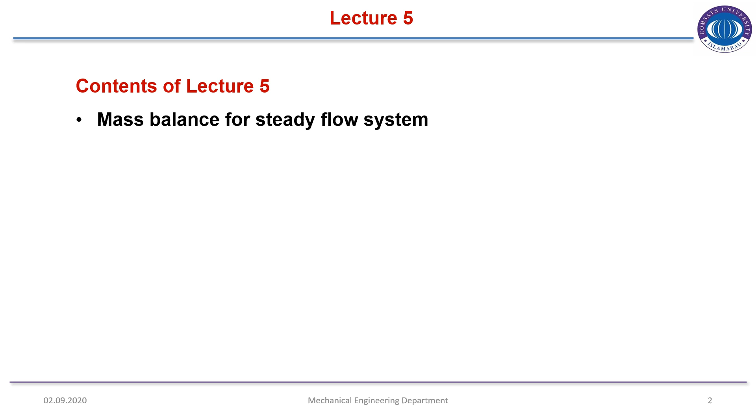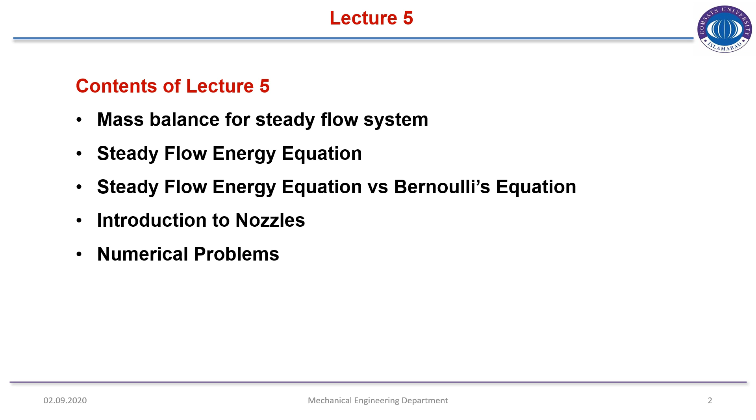Lecture 5. Contents of lecture 5 are mass balance for steady flow system, steady flow energy equation, steady flow energy equation versus Bernoulli's equation, introduction to nozzles, numerical problems, conceptual question and answers.

Mass balance for steady flow systems. First, we will discuss some basic definitions of different types of systems. The first one is non-flow process: a process occurring in a closed system which does not permit mass transfer across its boundary. You can compare non-flow process to closed systems. Mass cannot transfer across their boundary, however during non-flow process, energy and work can cross the boundary.

Flow process occurs in an open system which permits mass transfer across its boundary. So in flow process in an open system, mass is allowed to transfer across the boundary as well as energy and work.

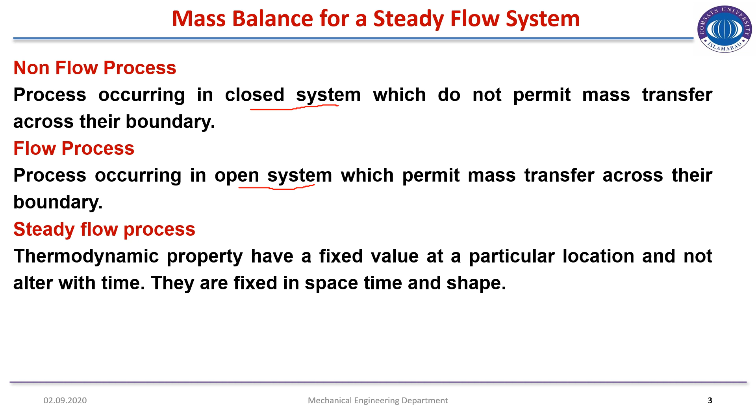Steady flow process: thermodynamic properties have a fixed value at a particular location and do not change with time. They are fixed in space, time and shape. Thermodynamic properties like temperature, pressure, mass flow rate, specific volume, all these are properties of the system. Therefore, in steady flow process, they will not change with time.

Even energy, the rate of energy in is equal to the energy rate at the outlet.

Non-steady flow processes, also known as transient flow processes, are where thermodynamic property varies or changes with time. They are not fixed in space, size and shape. So in transient flow process or non-steady flow process, energy flow in minus energy flow out is not equal to 0, whereas in steady flow, E in minus E out is equal to 0.

Similarly, mass flow in minus mass flow rate out is not equal to 0 in non-steady flow. We will discuss these processes in detail in the upcoming lecture.

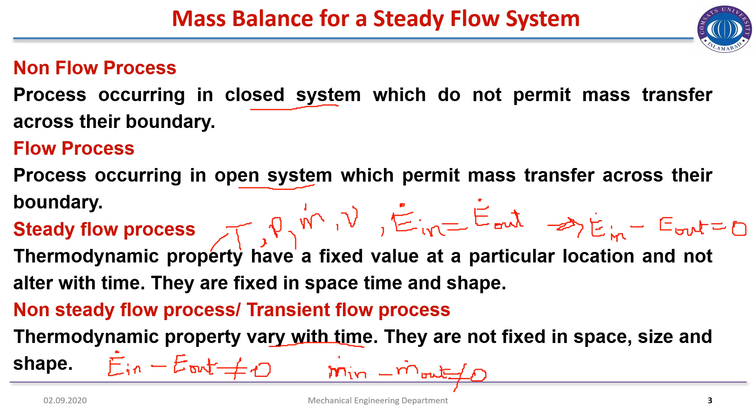Total amount of mass contained within a control volume does not change with time - this is talking about a steady flow system, steady flow process. Total mass entering the control volume is equal to total mass leaving the control volume per unit time. So mass flow rate, this is applicable for steady flow.

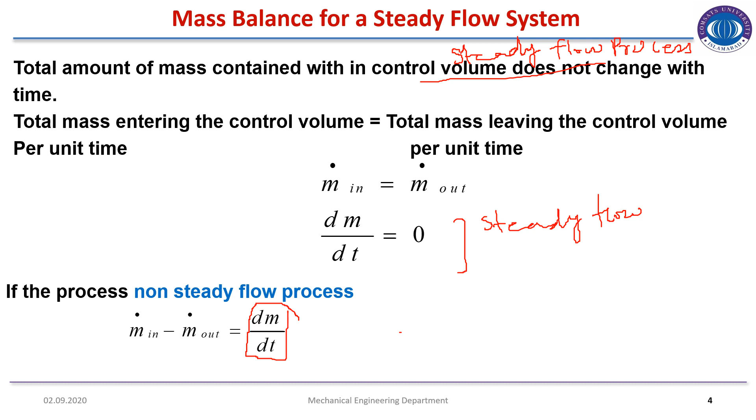In unsteady flow, this will have some value, as there must be an amount of mass transfer in non-steady flow process. You can understand it more easily: if the process is steady, 2 kg of mass per second entering means 2 kg per second mass flow rate will be out at the outlet. However, in non-steady flow process, there might be an instant where 1 kg or 1.5 kg per second mass is getting out.

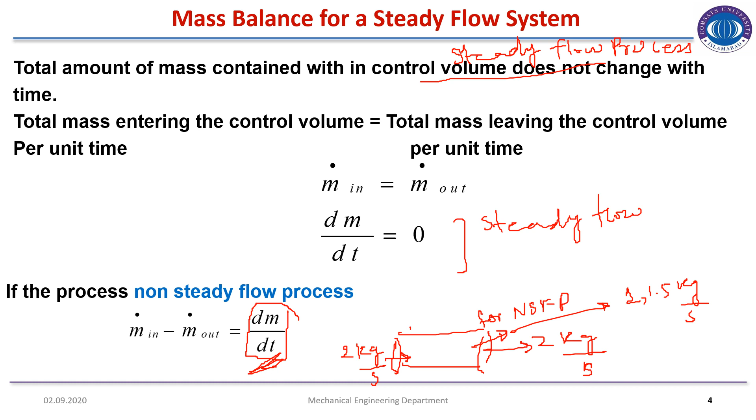That's why the change of mass flow rate is shown here. So this is the continuity equation, or you can say mass flow rate in is equal to mass flow rate out. We will derive a relation here. Density is equal to mass over volume, therefore mass is equal to density into volume.

On both sides we have divided the equation by time, and volume is equal to cross sectional area into length. So mass divided by second on the left, and on the right hand side that is density, cross sectional area, and velocity. Length or distance divided by time is equal to velocity, represented by small c. I have used small c to represent velocity so students should not confuse it with specific volume or volume.

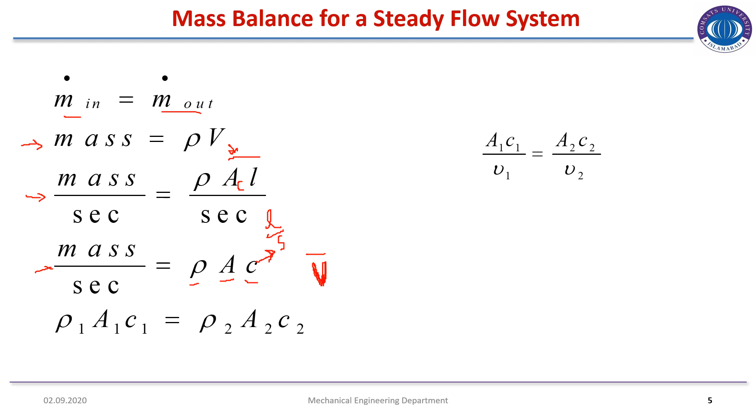In the book you might see the author has represented velocity with bold V. So you should not get confused - I have mentioned here also that C represents velocity.

So mass flow rate is constant. On the left hand side, this mass flow rate value is constant. Therefore we can obtain a relation: rho1 A1 C1 is equal to rho2 A2 C2 at any instant throughout the process, where rho is the density of the substance, A is the cross-sectional area, and C is the velocity.

As you know, density is equal to mass over volume, and density over mass is equal to 1 over volume.

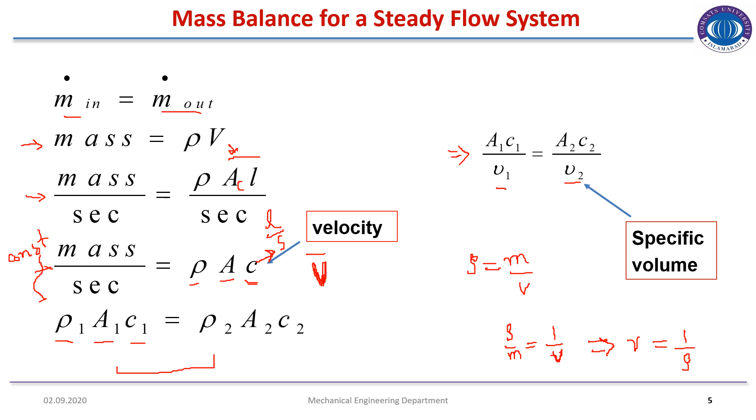Specific volume is equal to 1 over density. So we have replaced the density with the specific volume, which is the volume divided by mass. So the relation we have obtained is A1 C1 over V1 is equal to A2 C2 over V2, where A is the cross-sectional area, C is the velocity, and V is the specific volume.

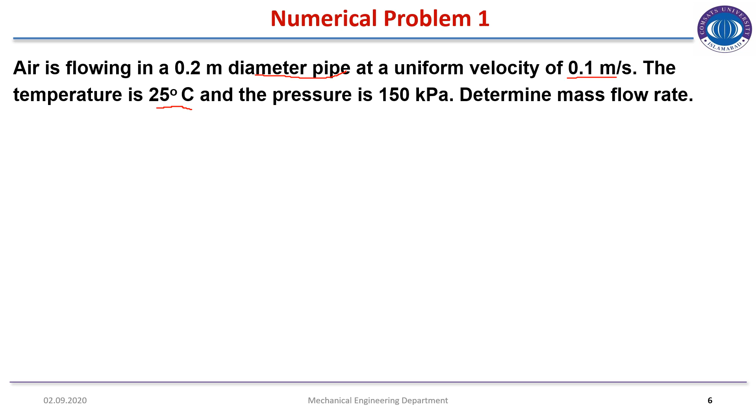Now we will solve a numerical problem. The statement of the problem is: air is flowing in a 0.2 meter diameter pipe at a uniform velocity of 0.1 meter per second. The temperature is 25 degrees centigrade and the pressure is 150 kilopascal. Determine the mass flow rate.

So there is a pipe. The values are, I have underlined the values. Diameter of the pipe is mentioned, velocity, and the temperature. In thermodynamics, you should always remember that wherever the word temperature is mentioned, all the formulae are used for the absolute temperature scale. Therefore, if a temperature is given to you in Celsius scale or Fahrenheit scale, you should convert it to Kelvin scale.

Now, this is the relation we have derived in the previous slide: M dot is equal to AC over V, where A is the cross-sectional area, C is the velocity, and V is the specific volume. We also know that this is the equation of state: PV is equal to mRT. We have divided this with M on the left hand side, so pressure into specific volume is equal to RT, and specific volume is RT over P.

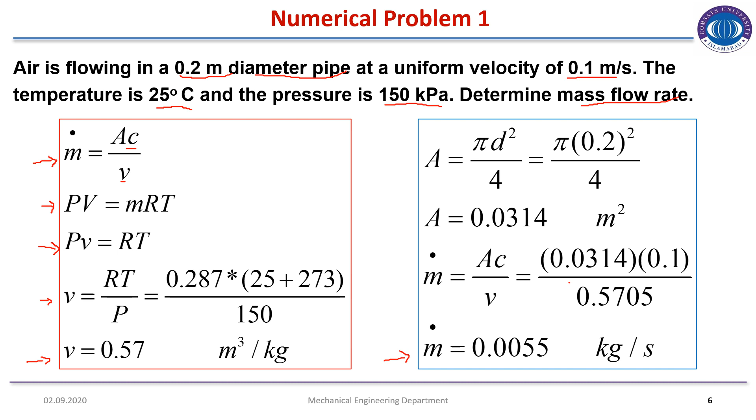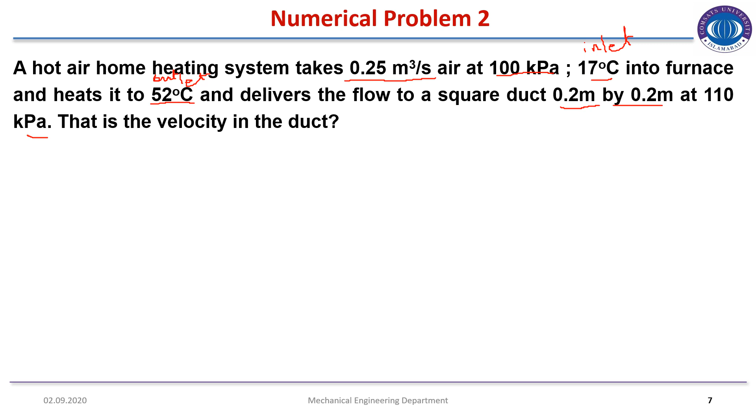So the main equation is that relation for specific volume. So mass flow rate is equal to volume flow rate divided by specific volume at the inlet, which is equal to mass flow rate at the exit, that is area of the exit, velocity at the exit divided by specific volume at the exit. So the ideal gas equation for the inlet is given as Pi Vi is equal to R Ti, where specific volume at the inlet can be calculated with the formula Vi is equal to R Ti over Pi.

Specific volume at the inlet is calculated here: 0.287 into 17, here we have converted Celsius temperature into Kelvin scale temperature. So that is the value of Vi. Similarly, equation of state at the exit point is Pe Ve is equal to R Te, and the specific volume at the exit is R Te over Pe, whose value comes out to be 0.8479.

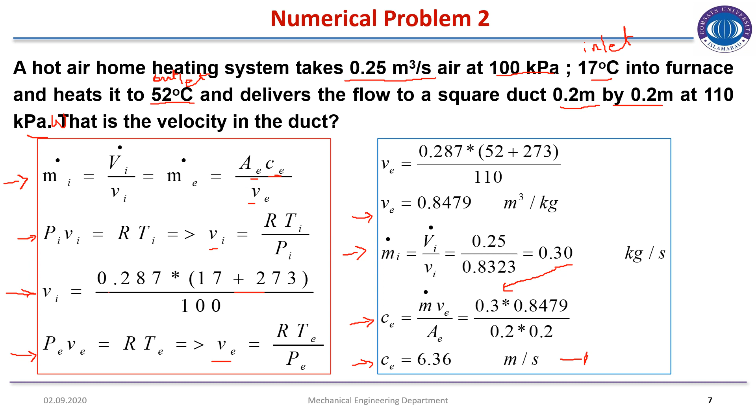So mass flow rate at the inlet, m dot i, is equal to volume flow rate at the inlet divided by specific volume at the inlet, and mass flow rate at the inlet is 0.3 kg per second. Velocity at the exit is equal to mass flow rate into specific volume at the exit divided by the area of exit. So mass flow rate we have just calculated, put here, and the velocity at the duct or at the exit is 6.36 meter per second. That was asked in the question.

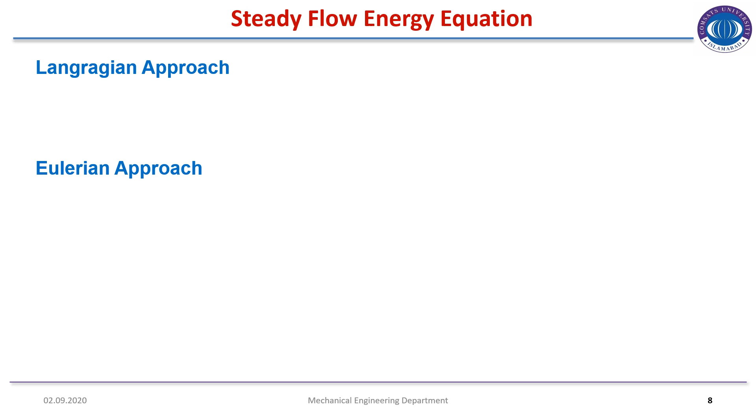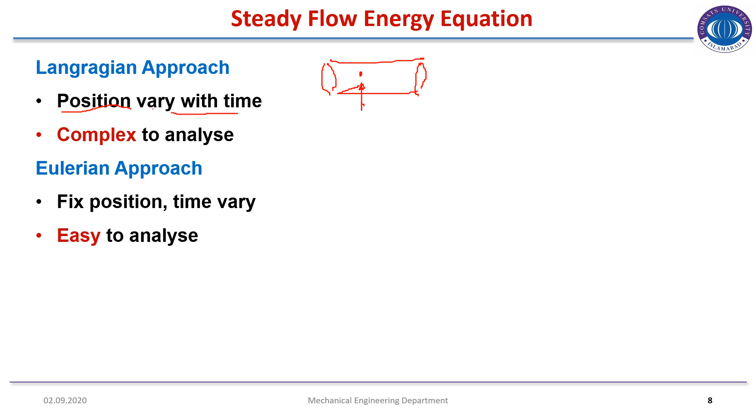So there are two basic approaches to solve the steady flow energy equation. The first one is Lagrangian approach and the second one is Eulerian approach. In Lagrangian approach, the position varies with time. As the time changes, the value changes. Consider a certain pipe, for example, this is point or position 1. So we will say that any particle passing through point 1 has a mass flow rate of 25 kg per second.

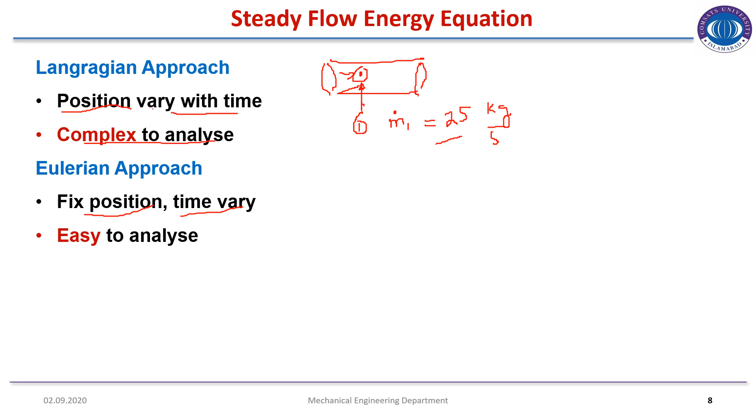In the Eulerian approach, the position is fixed. With the passage of time, the mass flow rate at a fixed position will be fixed, so the property is fixed. However, in the Lagrangian approach, the position varies with time, so when we measure mass flow rate at a specific position, the value will change. That is why the Lagrangian approach is complex to analyze, whereas the Eulerian approach is easy to analyze. Therefore, we will be using the Eulerian approach for our analysis.

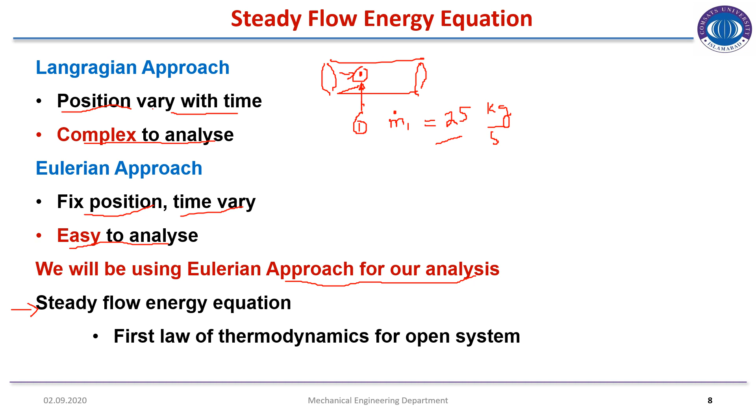We will be deriving the steady flow energy equation with the help of the first law of thermodynamics for an open system. For steady flow energy equation, the energy of the system is constant because we are studying steady flow. As discussed previously, in steady flow the energy of the system remains constant, that is, energy at the inlet is equal to energy at the outlet.

Now consider the figure shown on the right hand side. This is a vessel in which mass is coming in from here and mass is exiting from here. I will write inlet and outlet. Inlet and outlet, this is outlet.

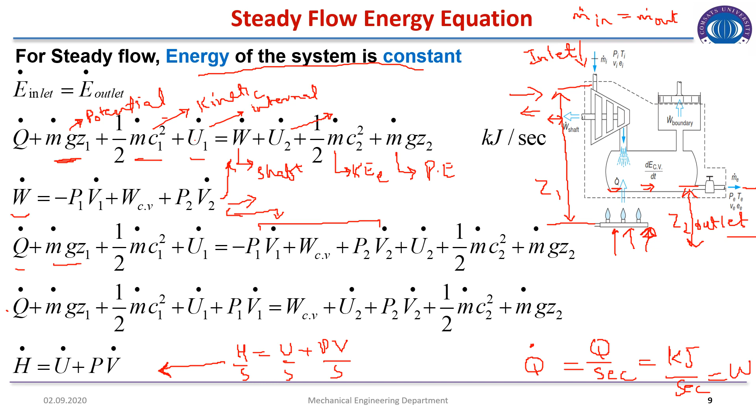The symbol dot means that the term is divided by time. So when Q dot is mentioned, it means heat flow rate, and the unit of this equation is watt, kilojoule per second or watt.

So in the above equation we have replaced the values of H dot 1 and H dot 2 on both sides, left hand side and right hand side.

Now for unit mass system, capital Q dot is equal to m dot times q. We have divided the entire equation by the mass. So Q is equal to Q dot divided by m dot. As we have divided both hand sides by the mass flow rate, we have obtained this equation.

Divide by m dot, mass flow rate. Both these equations are very important. You should remember these equations because this is known as the steady flow energy equation for open volume. You should also remember the units of these equations. For capital Q dot, the unit is kilojoule per second, or you can say it is equal to watt. Sometimes it will be mentioned as power in numerical problems.

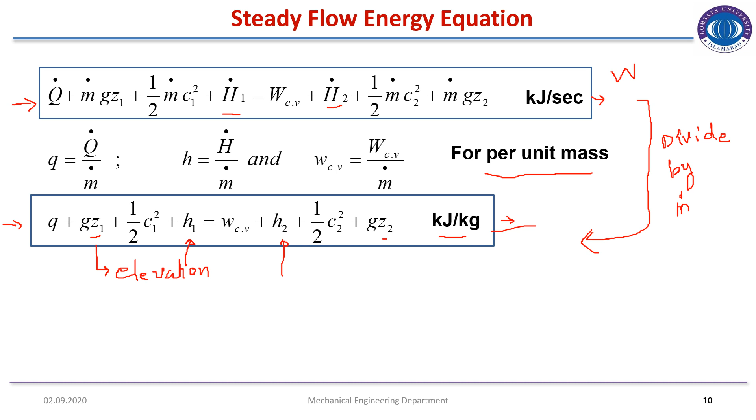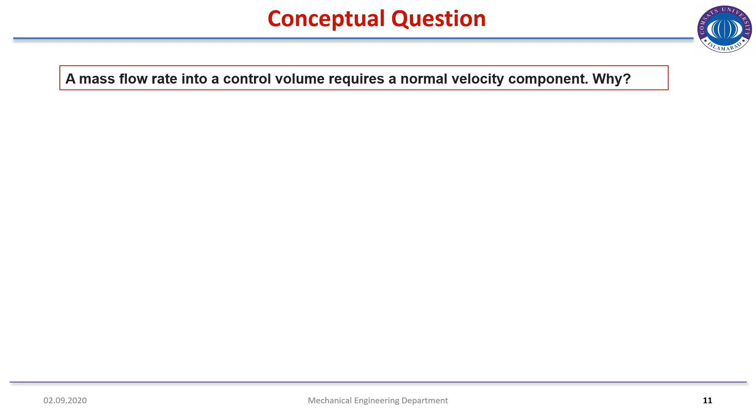Conceptual question. A mass flow rate into a control volume requires a normal velocity component. Why? The answer is tangential velocity component does not bring any substance across the control volume surface as it flows parallel to it.

The normal component of velocity brings substance in or out of the control volume according to its sign. The normal component must be into the control volume to bring mass in. Just like when you enter a bus, it does not help that you run parallel to the bus. What this is saying is that as velocity is a vector, it has two components.

That is normal and that is tangential. So this is a pipe, then that is the cross sectional area. So the normal component is responsible for the mass flow rate into the cross sectional area of the pipe. That is why the normal velocity component is required for control volume for a mass flow rate.

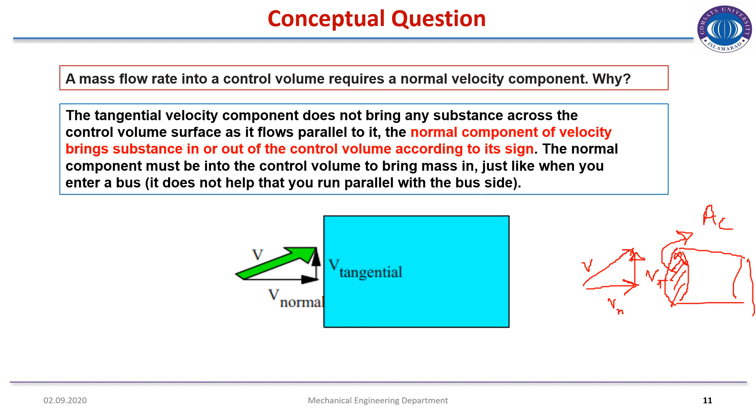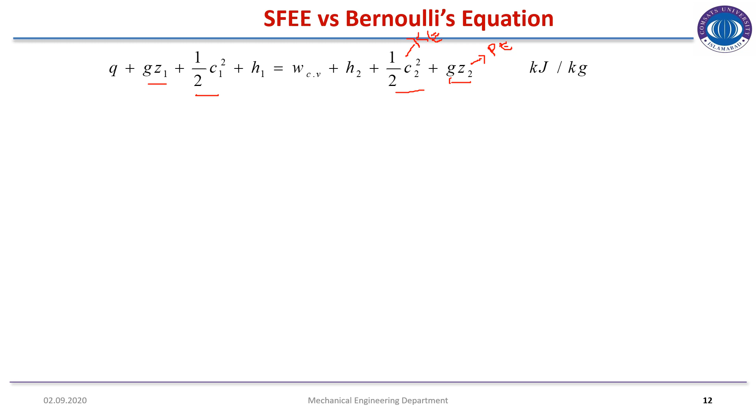Steady flow energy equation versus Bernoulli's equation. The steady flow energy equation is given by Q plus Gz1 plus half C1 square plus H1 is equal to control volume work plus H2 plus half C2 square plus Gz2, where Gz1 and Gz2 are potential energy components and half C1 square and half C2 square are kinetic energy components, and the unit is given by kilojoule per kg.

Steady flow energy equation is valid for both compressible and incompressible fluids. Compressible and incompressible means gases and liquids both, gas plus liquid. And Bernoulli's equation is only valid for incompressible fluid, that means Bernoulli is only valid for liquid.

Assumption for incompressible fluid. There are certain assumptions for Bernoulli's equation. Incompressible fluids mean liquids. T is equal to constant, that means temperature throughout the process will remain constant. No work interaction, that means control volume work will be equal to 0. There will be no change in the volume, therefore delta V is equal to 0. No heat interaction, no heat interaction. This means that Q is equal to 0.

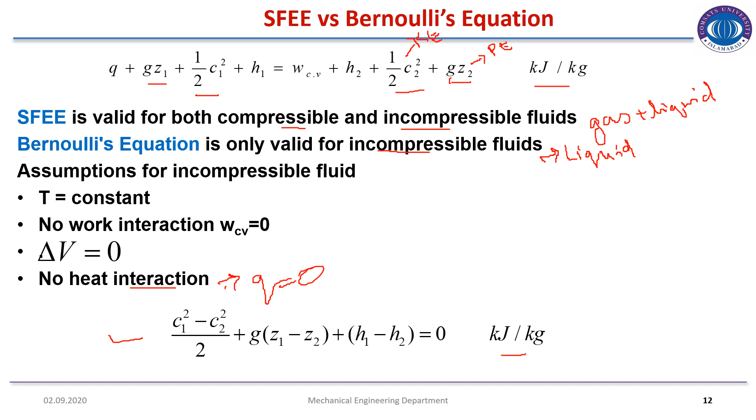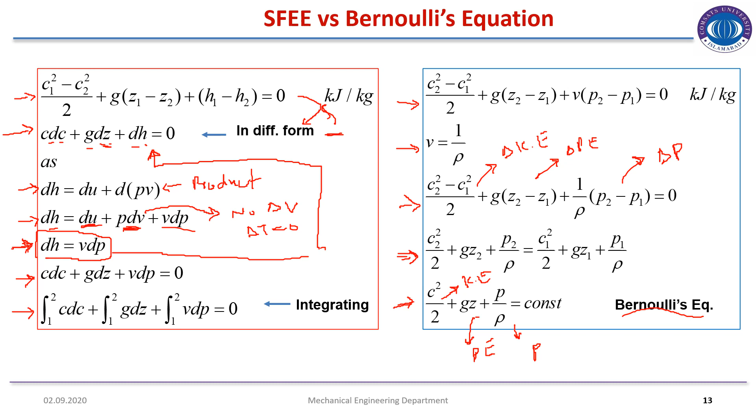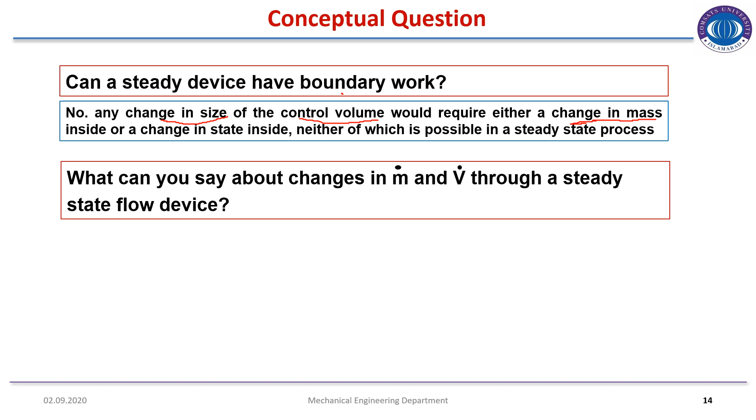Question: what can you say about change in m dot and V dot through a steady state flow device? Answer: according to continuity equation, mass flow rate at the inlet and outlet is same for single flow device. That is the basic assumption for steady flow process. Mass flow rate at inlet is equal to mass flow rate at the outlet.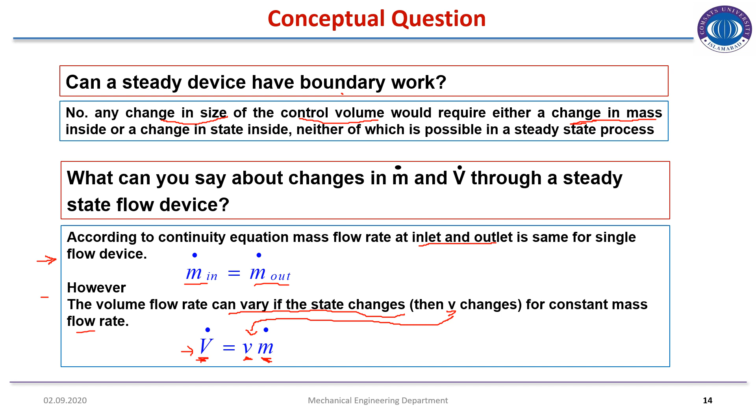However, the volume flow rate can vary if the state changes, then V changes. For a constant mass flow rate, volume flow rate is equal to specific volume into mass flow rate. So as this is constant, volume flow rate can vary, because if the state changes then specific volume changes, this will change, therefore this will also change, mass volume flow rate will also change.

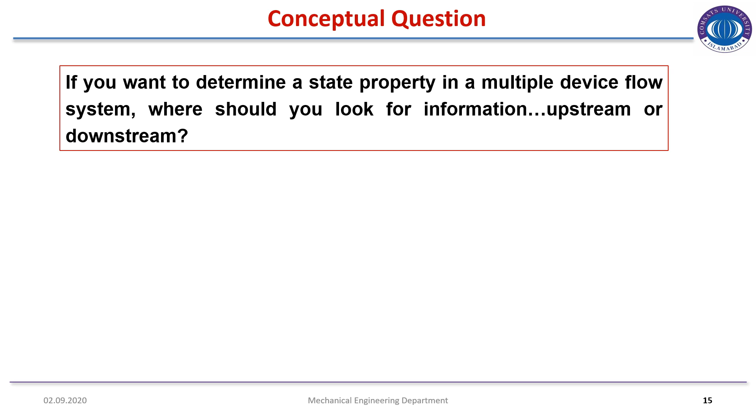Conceptual question: if you want to determine a state property in multiple device flow system, where should you look for information, upstream or downstream? First, you should know what is meant by upstream and what is meant by downstream. Upstream means at the inlet and downstream means at the outlet.

So if you want to determine the state property in multiple device flow system, where should you look? The answer is generally a flow is affected more in downstream than upstream. So flow is more affected at the outlet than inlet. So generally we will look at the outlet.

The second point states that only pressure information can travel upstream in subsonic flow. If the flow velocity exceeds the speed of sound, then pressure information cannot travel upstream. We will discuss what is subsonic and what is supersonic in the upcoming slide when we discuss the nozzle. So you should know that when the flow velocity is very low, less than the speed of sound, then pressure information can travel to the inlet, and if the flow velocity is greater, then even pressure information cannot travel to inlet.

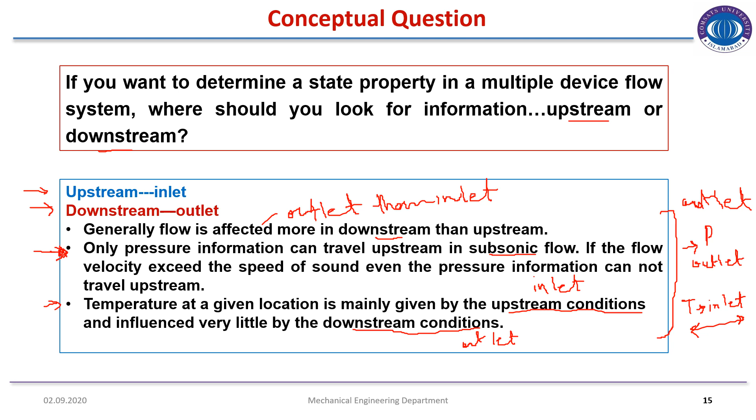Introduction to nozzles and diffuser. There are two main topics in thermodynamics: nozzles and diffusers. So what are nozzles? It is a device that accelerates fluid. During this process, the velocity of the fluid is increased and pressure is decreased or reduced.

It is an isentropic device. What is an isentropic process? The process in which the entropy of the system remains constant. Therefore, fluid passing through nozzles, the entropy of the fluid remains constant.

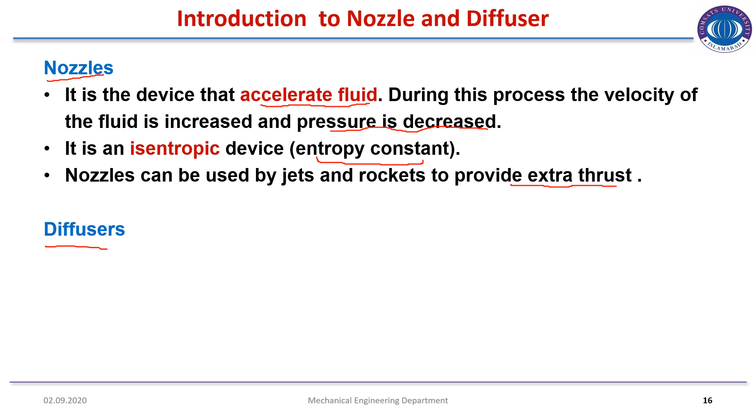Nozzles can be used by jets and rockets to provide extra thrust. That is an application of nozzles. There are different types of nozzles, and one of them can be used in jets and rockets to provide extra thrust, used in rocket propulsion as well.

Now for diffuser. Diffusers are devices which slow down the fluid. That means the velocity of the fluid is decreased with an increase in pressure. So nozzle and diffuser are opposite devices to each other. Nozzle accelerates the fluid, whereas diffuser slows down the fluid.

Now the similarity lies here. Both are isentropic devices. That means the fluid flowing through nozzle and diffuser, both of their entropies remain constant.

Many jet engines use diffuser to slow air incoming into the engine for more uniform flow. So as the function of diffuser is to decrease the velocity, jet engines use diffuser to slow down and decrease the velocity of air, so that there is a uniform flow of gases and combustion can be performed better.

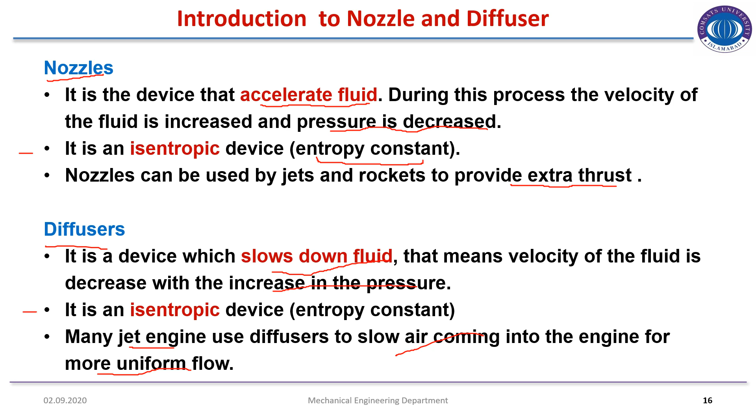Mach number. What is Mach number? It is the ratio of velocity of object to the speed of sound. The Mach number formula is written as Mach number equals velocity of fluid divided by velocity of sound. Generally in meters per second, at standard temperature and pressure, the velocity of sound is 340 meters per second.

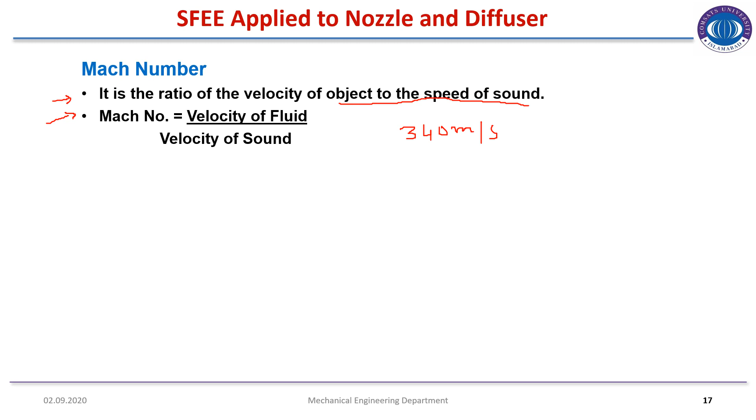So if you want to check the Mach number, divide the velocity of fluid by the velocity of sound. This value is at standard temperature and pressure, so the velocity of sound changes with temperature.

Now there are three cases a Mach number can come out to be. Case 1: if we divide the velocity of a fluid by the velocity of sound and the Mach number comes out to be less than 1, then the flow is called subsonic flow. Tap water is an example of subsonic flow because the velocity of water coming out of the tap is less than the speed of sound.

Case number 2: if the velocity of fluid flowing through a pipe is equal to the velocity of sound, then the flow is termed as sonic flow.

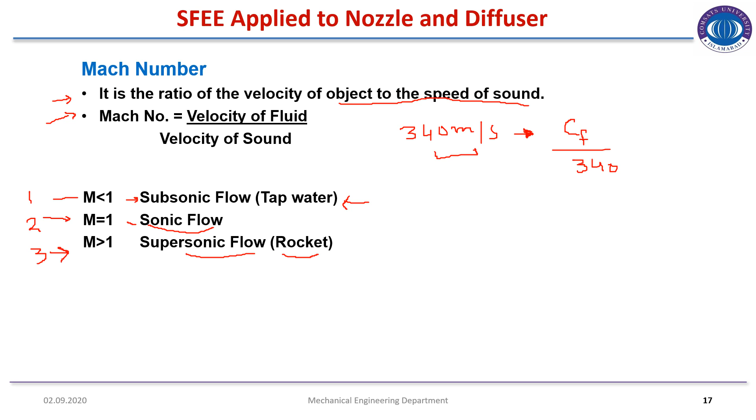Case number 3: if the velocity of fluid exceeds the velocity of sound, that means the velocity of fluid is greater than the velocity of sound, then the flow is termed as supersonic flow. So in rocket propulsion, as mentioned in the previous slide, in rockets and jets, supersonic flow through nozzles occurs in which the Mach number is greater than 1.

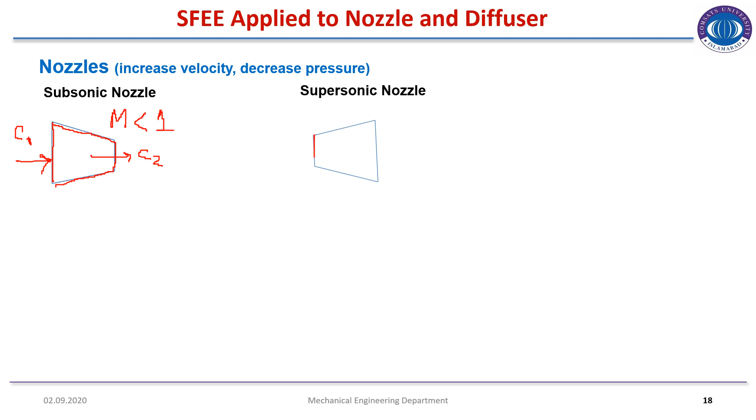Now if the flow is supersonic, then the schematic diagram of the nozzle will be this. For supersonic flow, m is greater than 1.

So if we want to increase the velocity again, this type of nozzle is used, where the inlet area is AI and the outlet area is AO. In a supersonic nozzle, AI is less than AO, whereas in a subsonic nozzle, the inlet area is greater than the outlet area.

Now, the convergent-divergent nozzle: if you have a flow whose velocity is less than the speed of sound, then the flow will be subsonic, so this portion will act as a subsonic nozzle. It is designed such that the flow at the intersection becomes Mach equal to 1, and in this section the flow will be supersonic.

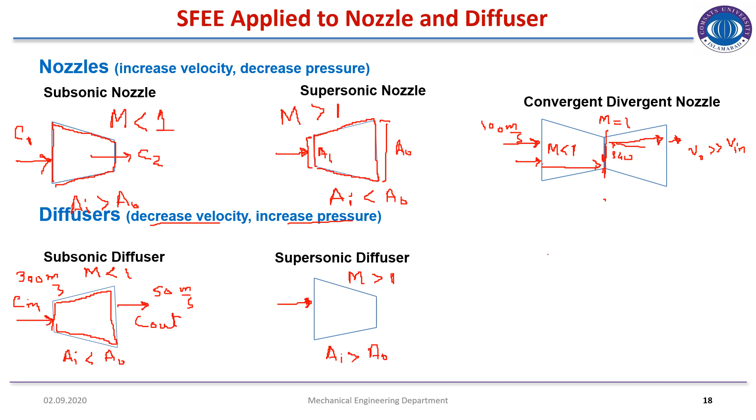Supersonic diffuser. Also here you should know that area at the inlet is greater than area at the outlet, similarly area at the inlet is less than area at a corresponding point for the nozzle case. So for a supersonic diffuser, Mach number is greater than 1 because the fluid flowing through it has speed greater than the speed of sound. So if C in has a velocity of 400 meter per second, then the speed will be reduced and C out will be 100 meter per second.

Convergent divergent diffuser. Similar to the convergent divergent nozzle, the function of the convergent divergent diffuser is also the same, to decrease the velocity of the fluid throughout the section. So if the velocity of the fluid entering is such, since its function is to decrease the velocity, let's suppose this portion will act as a supersonic diffuser and this portion will act as a subsonic diffuser.

So the velocity of fluid entering, let's suppose it is 700 meter per second. It is designed such that at the intersection Mach number is equal to 1. So velocity will reduce up to the intersection, where the velocity is 340 meter per second. In this portion as well the velocity will keep on decreasing and the fluid comes out to be 50 meter per second. All these values are for example only. This is not a hard rule that the fluid will be coming at the inlet of the supersonic diffuser at 700 and comes out to be 50 meter per second.

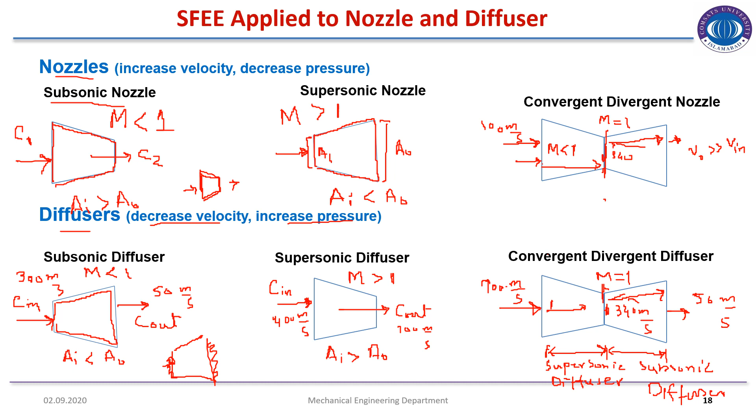You should remember this, and when we solve the numerical problems, we will see what type of nozzle and diffuser we should use for our problem.